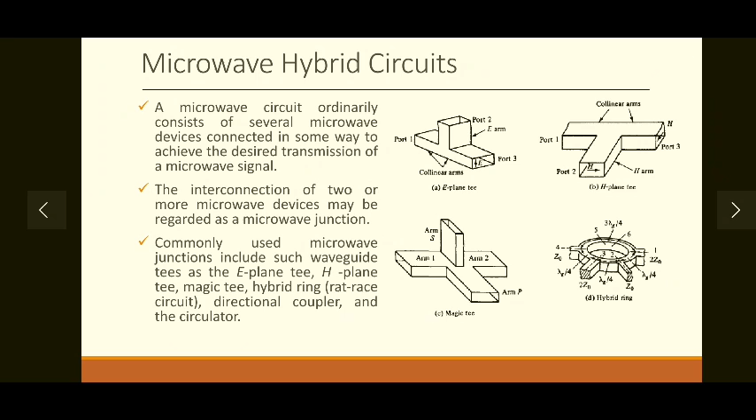So the interconnection of two or more microwave devices may be considered as a microwave junction. So this is what we can call a definition of microwave T's, that is, interconnection of two or more microwave devices will be called a microwave junction, which are referred to as T's if their geometry is like the English letter T. So commonly used microwave junctions include waveguide T's such as E-plane T, H-plane T, magic T, hybrid ring, which is also called the rat race circuit, directional coupler, and a circulator.

So on your screen you can see the diagram of these different devices. First diagram is of the E-plane T. Now T is a name given after its geometry. If you can see, this is a T, but it is like this one. So its main arm or collinear arm is in the horizontal direction, and the side arm is in the vertical direction. Then there is an H-plane T. We will see the functioning or actual geometry later on in the video. So then there is an H-plane T, which is completely in the horizontal direction. All the arms are in the horizontal direction.

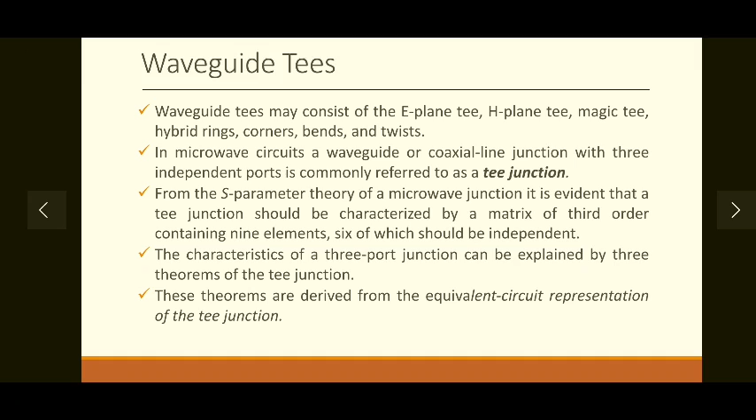So in microwave circuits, a waveguide or a coaxial line junction with three independent ports is commonly referred to as a T junction. So a waveguide or coaxial line with three independent ports. As from the geometry you can see, there will be three ports, 1, 2 and 3. So 3 ports will be a T junction. Now, how can we analyze or characterize these particular devices? We know that at microwave frequencies, our normal parameters such as ABCD parameters, H parameters, Z parameters, that is, those consisting of V and I, won't work. For microwave devices, we prefer S parameters.

Now, if S parameters are used for characterizing these T's, then what will be the size of the S matrix? For any microwave device with 2 ports, the S matrix is 2 by 2. In these T's there are 3 ports, so obviously the size of the S matrix will be 3 by 3, that is a third order S matrix. So 3 by 3 means a total of 9 elements, and out of these 9 elements 6 should be independent. Why that is, we will see.

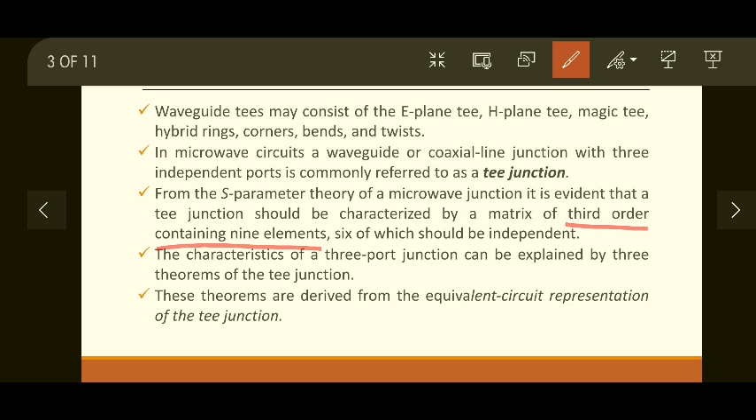The characteristic of this 3-port junction is explained by 3 theorems of the T junctions. These theorems are derived from the equivalent circuit representation of the T junction. So whatever geometry we have shown of rectangular waveguides or a combination of rectangular or circular waveguides, that T can be represented as a circuit, and that circuit will be analyzed by the S parameters. So what are the theorems associated with this circuit? The first theorem: a short circuit may always be placed in one of the arms of the 3-port junction in such a way that no power can be transferred through the other 2 arms.

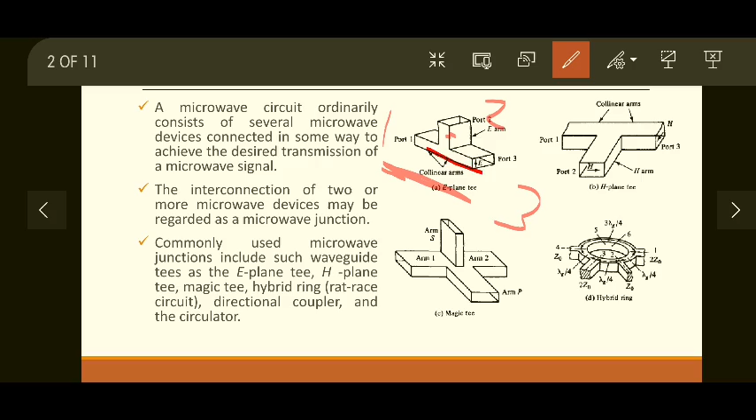So what's the meaning of this? There are 3 arms to the 3-port junction, as you saw in the previous slide. First one, second one, 3 ports, and these 2 are collinear arms, and this is a side arm that is on the second port. So if you place a short circuit in one of the arms, no power can be transferred via the other 2 arms. That is the first theorem. A short circuit may always be placed in one of the arms so that no power can be transferred to the other 2 arms.

The second theorem: if the junction is symmetric about one of its arms, a short circuit can always be placed in that arm so that no reflections occur in the power transmission between the other 2 arms. So if we consider a geometry like this one, if this part has a length equal to this part, then you can place a short circuit over here so that this will be matched, and there will be no reflection in the other 2 arms. Whenever you apply an input, if there is a short, there will not be any reflection between the other 2 arms. That means maximum power will be transferred from the first port to the third port, because there is a short here. So that is the second theorem.

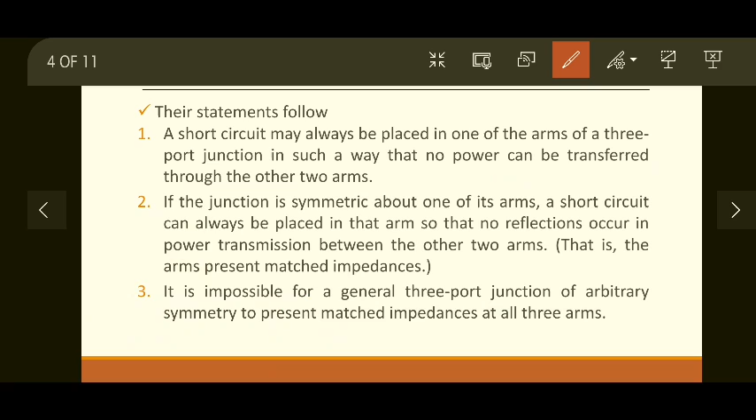Then the third theorem: it is impossible for a general 3-port T junction of any arbitrary symmetry, not necessarily equal arm lengths, to present matched impedances at all three arms. So considering the same geometry, it is impossible to construct a three-port junction that presents matched impedances at all three arms. You cannot provide any construction that will transfer maximum power from the first port to the second port, and at the same time from the second port to the third port, or the first port to the third port. Maximum power cannot be transferred to all ports at the same time. How or why this is, we will see later on.

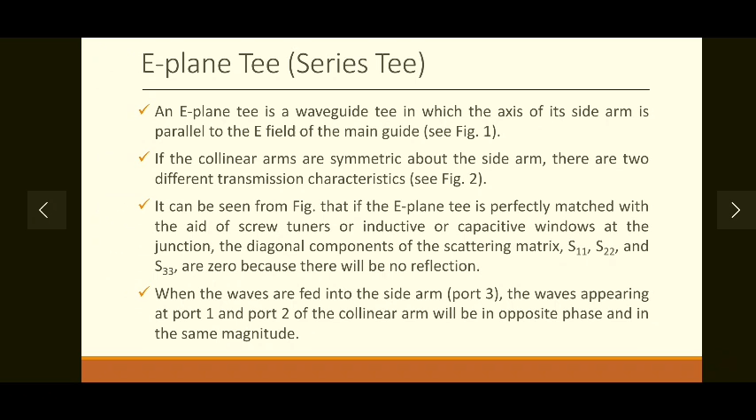Let's look at the first type of T, called the E-plane T, also called the series T. An E-plane T is a waveguide T in which the axis of its side arm is parallel to the E field of the main guide. Let's look at the figure first. This is figure 1. What is the axis of the side arm? You can see here, this is a side arm in the vertical direction, and its axis will be like this. The axis of the side arm is parallel to the electric field in the collinear arms. The electric field direction is vertical and its axis is parallel to this, so such a T is known as an E-plane T. Now in the first port the direction of the E field is upwards, so in the other port it will be downwards. How? Let's see that.

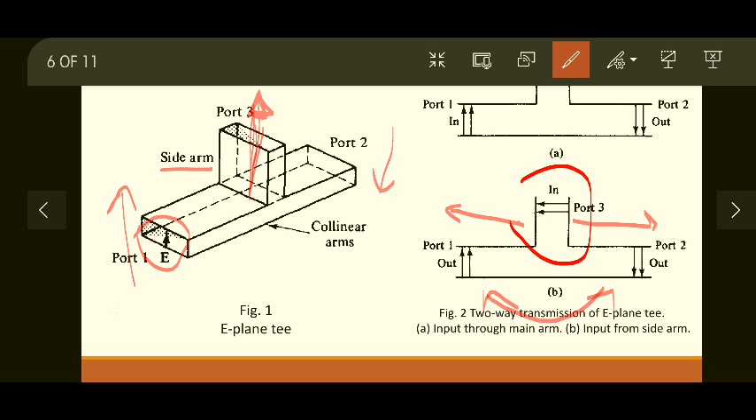The second statement: if the collinear arms are symmetric about the side arm, there are two different transmission characteristics. What's the meaning of this statement? Let's go to the next slide. These two arms are the collinear arms. If they are symmetric, that means this length is equal to this length about the side arm. This is our side arm. So if they are symmetric about the side arm, then there are two transmission characteristics. Which are the two? First one, input through the main arm. So here, if I give input in the first port, what will happen? And output will be taken from this arm.

Input is given to port 1, output is taken from port 3 and port 2. Okay, you can see in the diagram A of figure 2. The second characteristic is input from side arm. In the first characteristic, or in the first way of transmission, you can give input to this arm also. So output will be taken from side arm and other collinear arm. Okay, so that is a possibility in first case also, input through the main arm. This is a main arm.

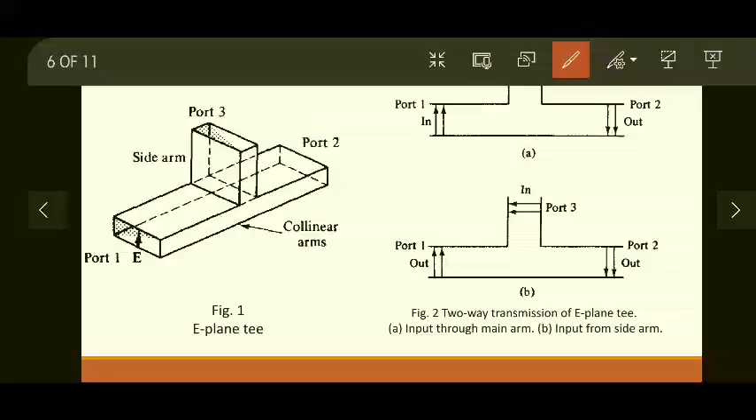Okay, now the second way in which you can apply the input is input through the side arm. So if input is given from the side arm, output will be taken from main arms. Okay, so it will go through this and it will go like this. Okay, so this is simple construction. So that is how two types of transmission are possible.

So it can be seen from the figure that E-plane T is perfectly matched with the aid of screw tuners or inductive or capacitive windows at the junction. The diagonal components of scattering matrix will be 0 because there will be no reflection. So what's the meaning of this statement? If I place a screw tuner at the junction on the side arm, or inductive or capacitive tuner, if I place it here, remember the second theorem, then maximum power will be transferred from first port to the second port because this is shorted or tuned, so matched condition is obtained, and because of this, it is said diagonal elements of S matrix will be 0.

Why? We know that in the S matrix, diagonal elements represent reflection coefficients. Since maximum power is transferred, that means there is no reflection. If there is no reflection, that means diagonal elements will be 0. Okay, so that is what is mentioned in this particular statement. So if we match the side arm at a junction, maximum power will transfer, no reflection. Okay, and S11, S22, S33 all are 0.

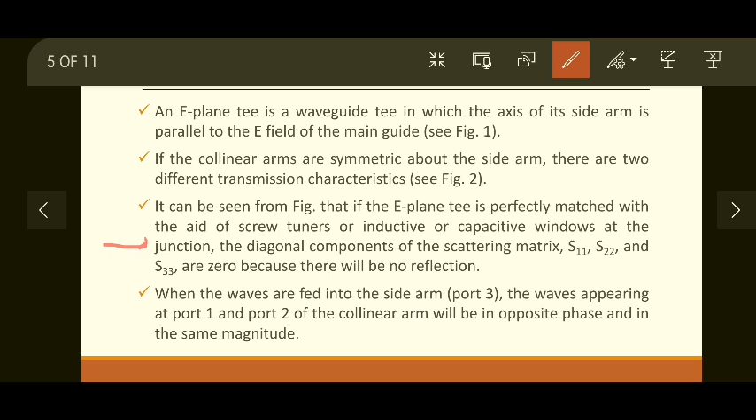When the waves are fed into the side arm, that is at the port 3, the waves appearing at port 1 and port 2 will be in opposite phase but having the same magnitude. So that's the meaning. If we apply input here, output will be from here and here. So if electric field direction is upwards for port 1, it will be downwards for port 2. That means magnitude will be same but the direction will be opposite, that is phase will be opposite. Okay, so that's the meaning of that particular statement.

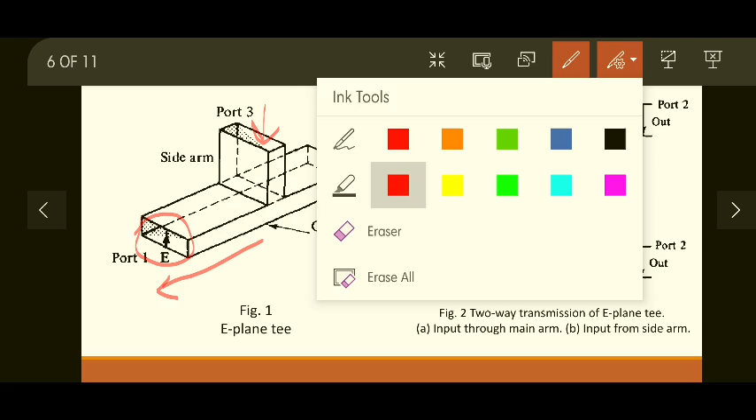Okay, so let's move on to the analysis or characterization of this particular series T. So E-plane T characterization. Now first statement we are saying that because of this construction, S13 is equal to minus of S23. Now how is this assumed? What are the different S parameters that we can observe? Consider this particular diagram, that is figure 2b. Now if input is given here, now where are the S parameters? Now at port 1 I will have S13, that is first port and third port. Here I will have S23, and here I will have S31, S32, and at the junction, if any reflection occurs, for that S11 here, S22 here, and S33 here. So S11, S22 and S33.

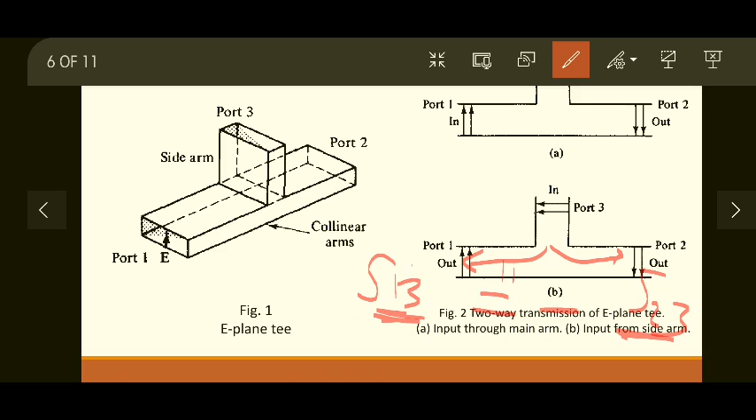Okay, so these are considered as 0 because no reflection is assumed. So because of this, S13 is equal to minus S23. So how is it? Let's see. Forget about this. Now if input is given from port 3, output is taken from port 1 and port 2, that will be equal in magnitude but opposite in phase. So if equal in magnitude, S13 is equal to S23 but opposite in phase, that means S13 is equal to minus of S23. Okay, so that's the meaning, because output is divided into the two arms, considering this a symmetry. Okay, so that's the meaning of this particular assumption.

S13 is equal to minus S23. So the meaning of this assumption is that this does not mean that S13 is always positive or S23 is always negative. You can write minus S13 is equal to S23 also. Meaning of negative sign is that they are opposite in phase. Okay, the negative sign does not represent algebraic negative. Okay, it is regarding the phase of the two particular parameters. Okay, the negative sign merely means S13 and S23 have opposite signs. That's the meaning.

S13 and S23 have opposite sign. For a matched junction, the S matrix, now for a 3-port junction, that's why it is 3 by 3 order, is given by this. Now the diagonal elements, these are reflection coefficients, all are assumed to be 0 because there is no reflection, that's what we have assumed. Then the other elements are mentioned according to the matrix representation.

Now recall the properties of the S matrix. The first property, that is the symmetry property of the S matrix, tells us that symmetric terms are equal. So if we consider this property, S12 is equal to S21, S13 is equal to S31 and S23 is equal to S32, because we know the S matrix has a symmetry property.

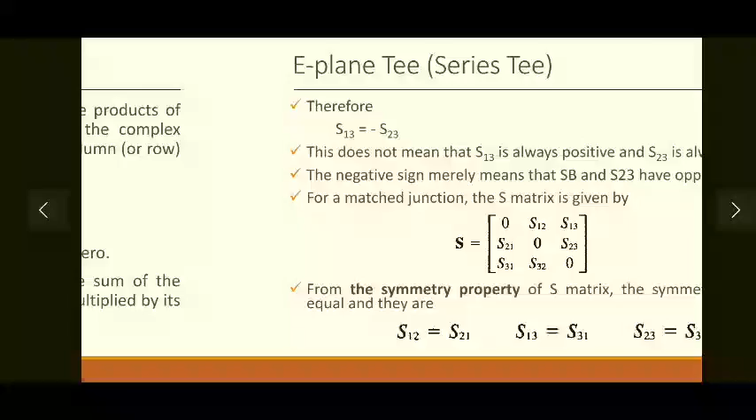Now if we consider this symmetry property, what about the other properties? That is the zero property of the S matrix. What does the zero property of the S matrix tell us? The sum of products of each term of any column multiplied by the complex conjugate of the corresponding term of any other column is 0.

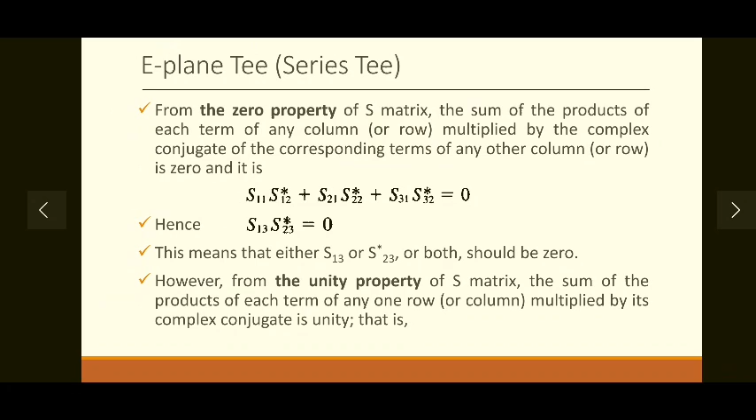That means if you consider S11, S21 and S31 here, and here it will be S12, S22 and S32. So the zero property means S11 into conjugate of S12, S21 into conjugate of S22, and S31 into conjugate of S32. If we add all of these three, then it will be 0. The same thing you can do for the second column and third column also. So that is the zero property.

So therefore S13 into the conjugate of S23 will be 0, and because of this either S13 or S23 conjugate, one of them should be 0. Now a combination of the symmetry property and the zero property is used in this case. Because of this, one of them has to be 0 or both may also be 0.

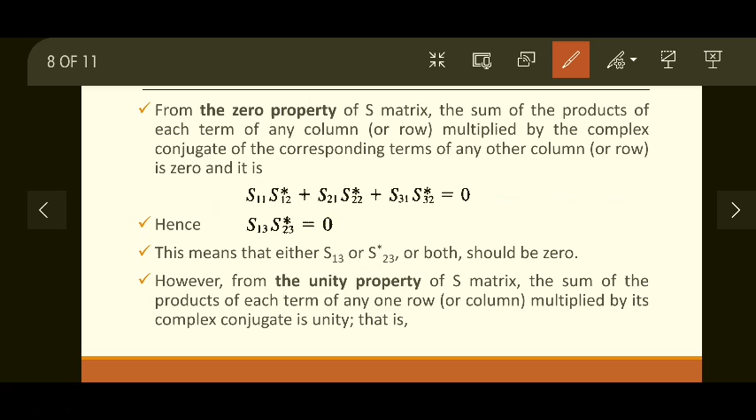So if we take a particular column, what will happen? Let's consider only one column for understanding, that is the first column: S11, which is 0, S21 and S31. What does the unity property say? This is 0, so ignore it. S21 into its conjugate plus S31 into S31 conjugate is equal to 1. Similarly, you can apply this property to the other two columns as well.

So if we substitute the results of the symmetry property in the above equations, what can we say? S21 and S12 are equal. So here I will put S12, so mod of S12 squared is equal to, taking this term to the right hand side, 1 minus mod of S13 squared, because S31 is nothing but S13 from the symmetry property. Similarly, 1 minus mod S23 squared is equal to mod S12 squared. The same thing will happen in this case also. This is the equation that we get if we substitute the symmetry property in these equations.

So from these equations, what can we say? This is contradictory, because at the beginning what we have assumed is S13 is equal to minus S23. Now does it apply over here? If S13 is 0, then S23 will also be 0 because of the statement that we initially assumed: dividing of the wave or power into two equal arms, equal magnitude, opposite direction. Because of this we have assumed this one. Now if S13 is 0, S23 is also 0, or if S23 is 0, S13 is also 0.

So if we substitute that here in these two equations, that will not be equal to S12, because this total will be equal to 1, not 0. 1 minus 0 will be equal to 1, and S12 will become 1. So this is contradictory. So the above result of substitution is not true.

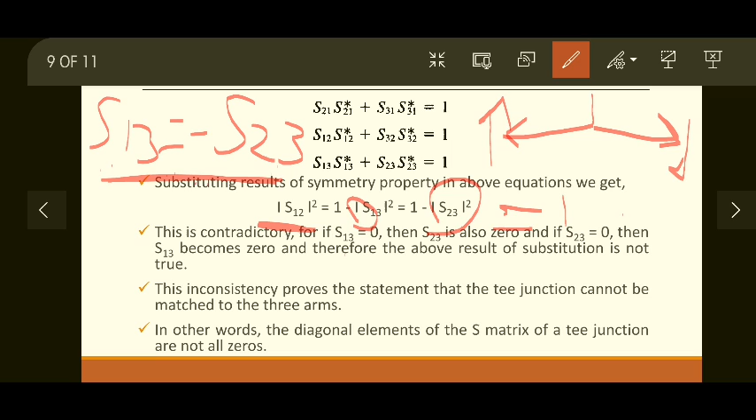So this inconsistency proves the statement, that is the third theorem: a T junction cannot be matched at all 3 arms. So why have we done all these assumptions and properties? To prove the third theorem, which states that all the 3 ports or all the 3 junctions of the T cannot be matched for perfect power transfer. In other words, the diagonal elements of the S matrix of a T junction cannot all be 0 at the same time.

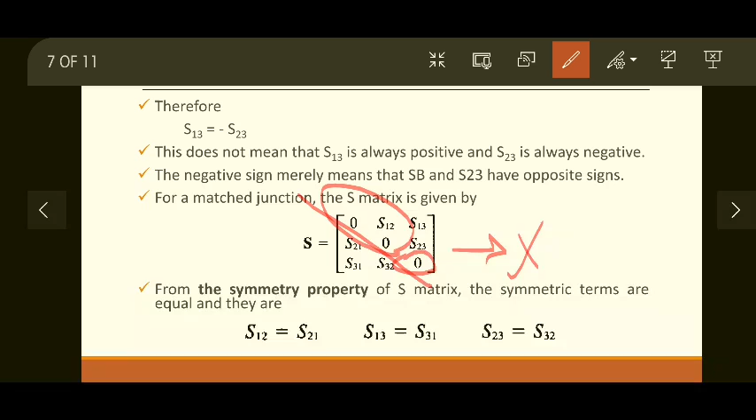So whatever we have assumed in the S matrix previously, that all 3 are 0, that cannot be true. 2 can be 0, but this cannot be 0. Or if these 2 are 0, this cannot be 0. So all 3 of them cannot be 0 at the same time. That's the conclusion of all this calculation. Okay, so what will be the S matrix?

When an E-plane T is constructed of empty waveguide, nothing inside it, that means no dielectric medium, and generally it is poorly matched in that situation. So hence all the diagonal elements are not 0, that we know now. Therefore collinear arms are usually symmetric. We know that nobody constructs a T where collinear arms are asymmetric. So if collinear arms are symmetric, then S13 will be equal to S23, considering only the magnitude, and S11 will also be equal to S22 because of maximum power transfer.

So what's the meaning? If this is my T with these two arms of equal length, then S13 is equal to S23 considering only the magnitude, and here I have S11 and here I have S22. Both will be equal because all that power will be transferred from the first arm to the second arm, and there is no reflection coefficient and no reflection. Therefore the S matrix, where we don't care about the third arm, can be simplified to this particular matrix.

Here you can see S11, and instead of S22 we have mentioned S11 again, and similarly the symmetry property is observed here: S12, S12, here S13, S13 because of the symmetry property, and S13 is equal to minus S23, or vice versa, S23 is equal to minus S13. That's why here minus S13 and minus S13, and this S33 is different. It is not 0, it is not 1, it may have some value. So this is the final representation of the S matrix for any T constructed from waveguides.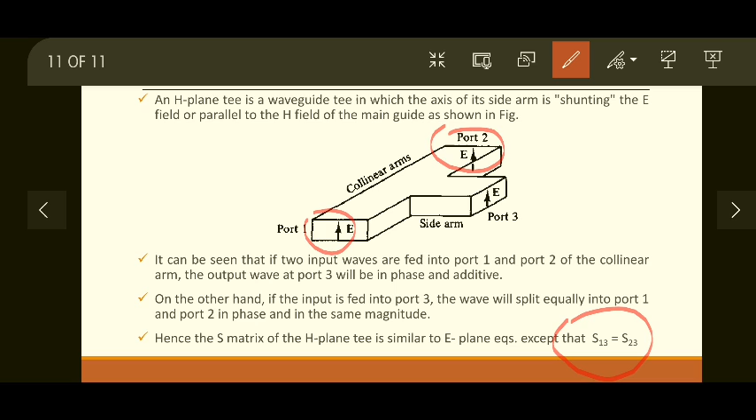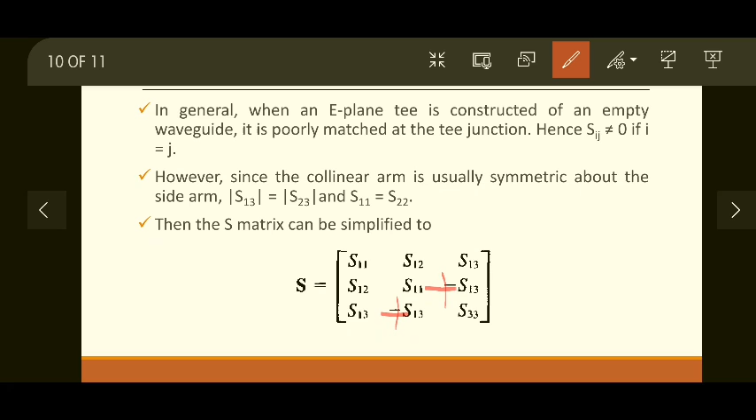So if you compare E-plane T with H-plane T, what is the difference? Electric fields are in phase in the H-plane T, electric fields are out of phase in the E-plane T. So that's why S13 is equal to S23. Other equations will remain the same. So what will be the changes in the S matrix? Here for H-plane T we will get plus S13. Apart from that, every other term will remain as it is for the H-plane T.